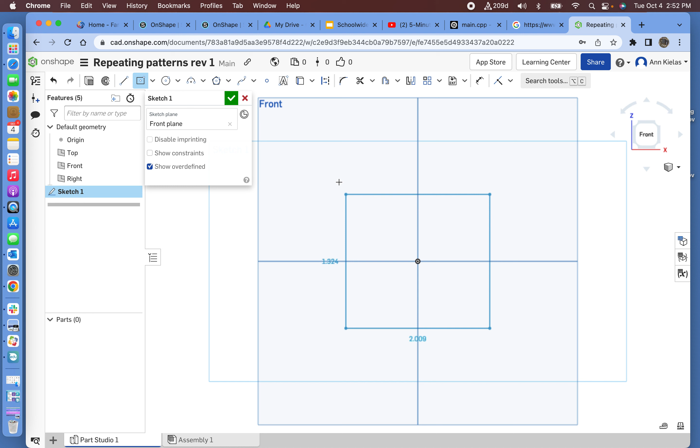I'm going to keep this super simple. So I'm going to go to the front plane and make a sketch on the front sketch plane. I am going to make a center point rectangle, and make it 3 by 3, so 3 enter to get a 3 by 3 inch square.

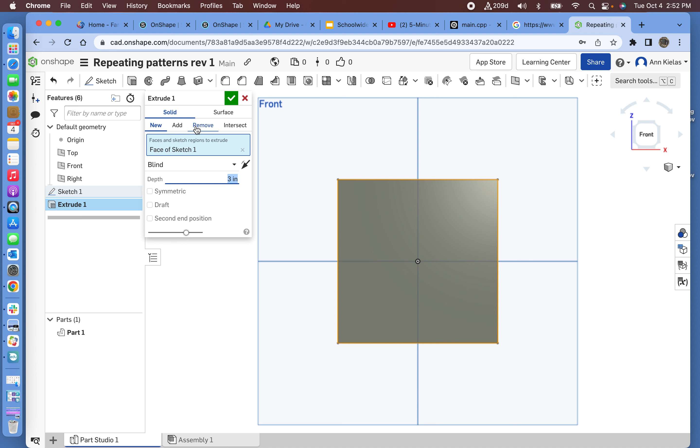I'm going to save that, and extrude it on the face of that square on the plane, and change the depth to 3 inches. That's a new extrusion, it's solid. Click the green check, and then if I go to isometric, you can see that it is a 3-inch cube.

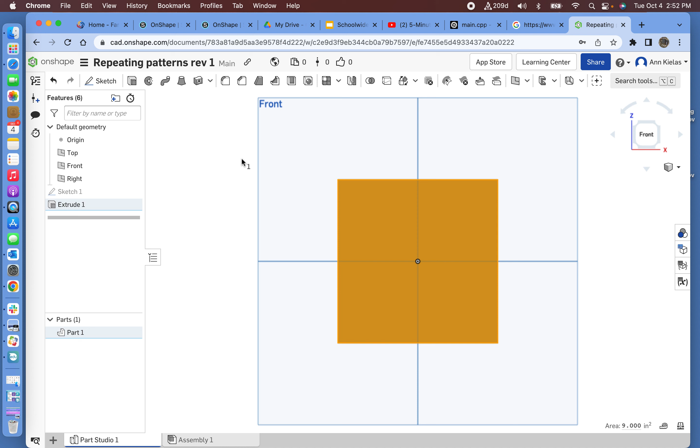Now, here's where we get into the repeating patterns. I am going to make a new sketch on this face of extrude 1. I'm going to make it super simple, so I am going to draw a line from here to here, exactly 3 inches. I'm going to dimension this that it is 0.5 from that top surface.

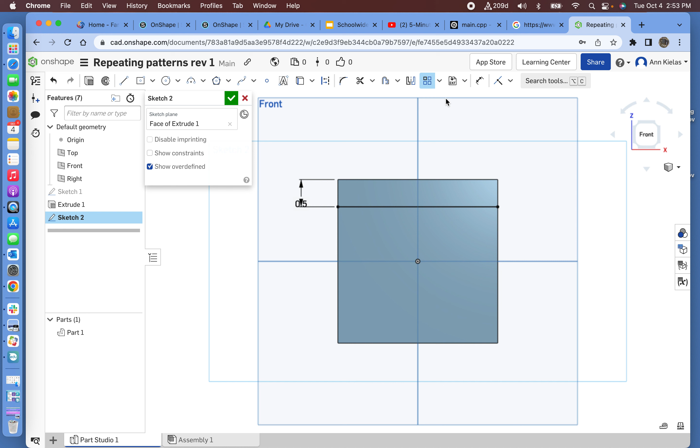I'm going to go up to this toolbar where I'm pointing, and point at the one that has 4 little squares. It says linear pattern. I'm going to point on the arrow to the right of it, and choose a linear pattern. I'm going to choose this line to make a linear pattern with.

Now this is going the wrong way, so what I'm going to do is drag this point over to here. See how I'm doing that? So it's right on that thing. The distance right now says 0.68, so I double clicked on it, made it 0.5, and hit enter.

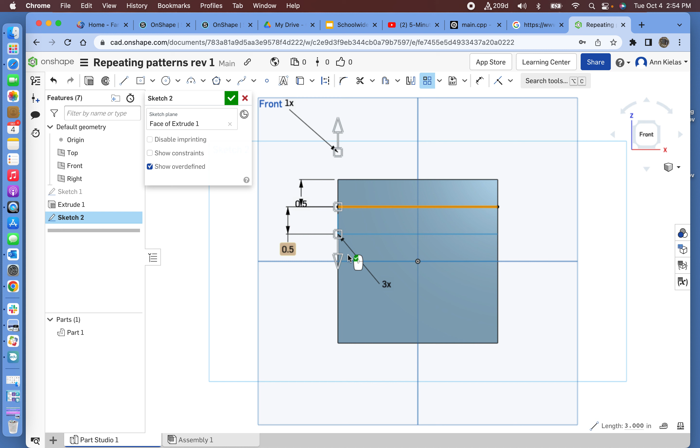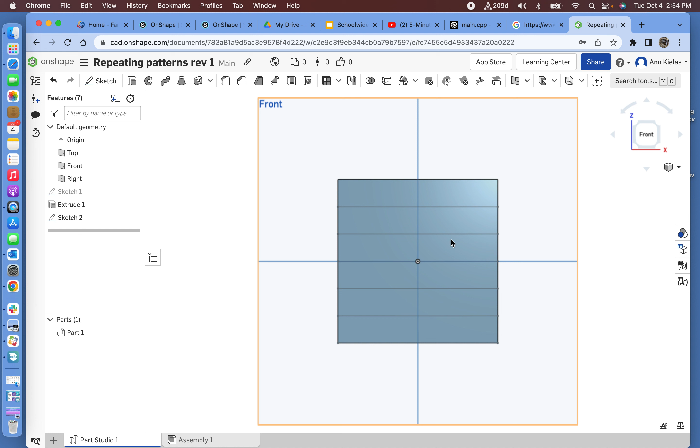Now I've made that 0.5 from the first line, and I'm going to say I want this 6 times. So I'm going to double click on that 3 times and change that to 6. Now you can see that I have put lines all the way across 6 times. I'm going to click this, and you can see on my square it has 6 lines.

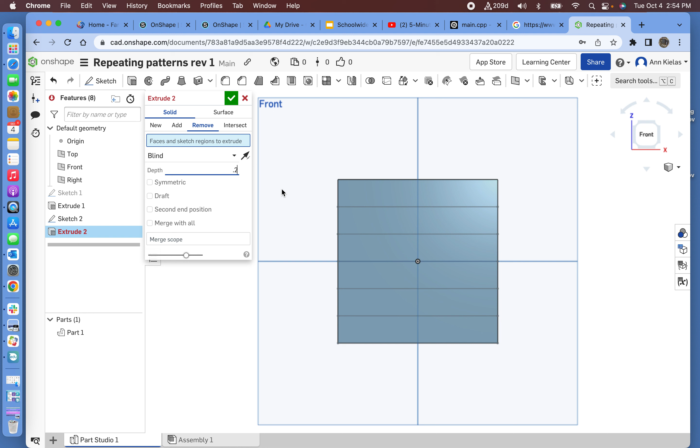Now, a cool thing that I could do now with my repeating pattern is I can do an extrusion. I'm going to remove material, just to a depth of 0.2. The faces that I want to remove are this one, and this one. Removing material, and I'm going to click down here on merge with all, or it won't work. And I'm going to click OK.

Now when I go to my isometric, you can see that I took out, let me go to the right side view, you can see I made little cuts all the way across, again changing it to isometric. So that's a way that you can do repeating patterns.